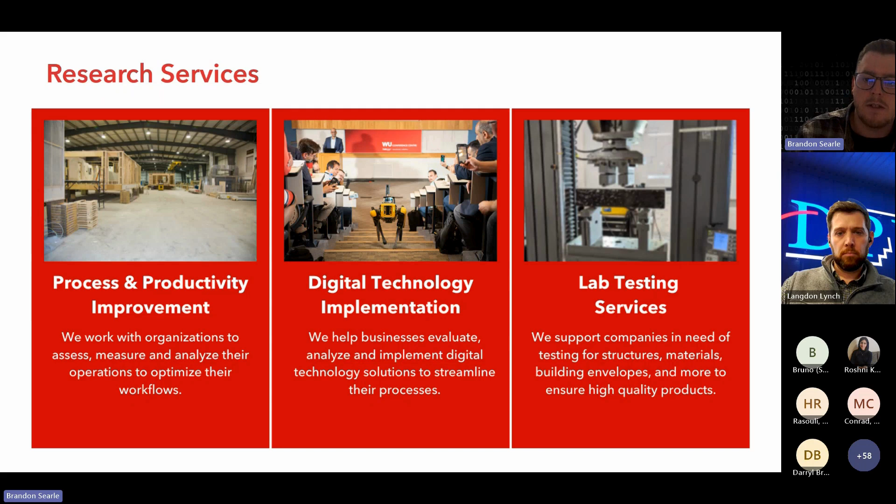Over the last 5 years, we've really focused on 3 core areas of research: process and productivity improvement, and digital technology implementation, which kind of overlap, as well as lab testing services. We've recently completed the training and commissioning of our new equipment for the building envelope testing lab, which will focus for now on air testing and water leakage, and we hope to get into other forms of testing in the future. We're excited to be doing that in 2025.

And so we do a lot of research in that area, which will hopefully guide policy, current state of the sector, new standards, procurement strategies, etc., to be able to leverage the sector and really hopefully increase productivity in the construction sector.

So in addition to the OCRC, I'll put on my Building Transformations hat. I sit on the board of directors here. Building Transformations is a not-for-profit organization, originally branded as Canada BIM Council, and has since rebranded over the last 5 years.

and has a presence across North America. Building Transformations drives the building and construction industry forward. It has many programs to serve members, including both in-person and online events, a certification program for professionals, organizations, and educational institutions, and think tanks for different segments of the construction industry, as well as the annual awards program and the annual Innovation Spotlight publication.

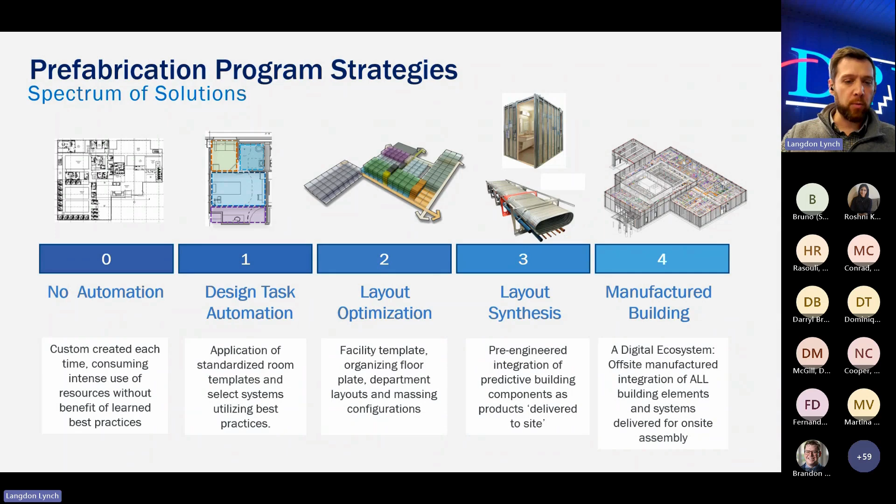Once we get into the actual projects themselves, we start very early on, and we try to get as far left of the line as possible with our teams, and really get them an understanding of what's out there, what potentially can be prefabricated, and what's good to potentially prefabricate. I feel like I say it all the time, but just because you can prefabricate something doesn't necessarily mean you should.

It has to make sense from an overall cost and schedule standpoint, as well as execution. Execution is definitely a big thing we've found here. It can be a hurdle if we have a team that doesn't have a lot of experience with something, and doesn't have the means, understanding, or even local workforce to facilitate the individual scope or installation. That's where that national team comes in, where we have SMEs that can dive in, people like myself and others who can really sit with the team and outline the specifics around the individual prefabricated units.

Moving from the pursuit phase into SD, that's when we really start to look at overall pricings and quotes, as well as start to integrate the individual scopes into the overall design process. The best case scenario is that we can get these things baked into the design before we get to that final design set that we're going into buyout with.

From there, we really are looking at, let's track what we're doing here. We feel that if we're not keeping score, it's just for practice. So we really like to make sure that we're understanding, is this something that worked for cost, worked for schedule, but is it working for our field teams?

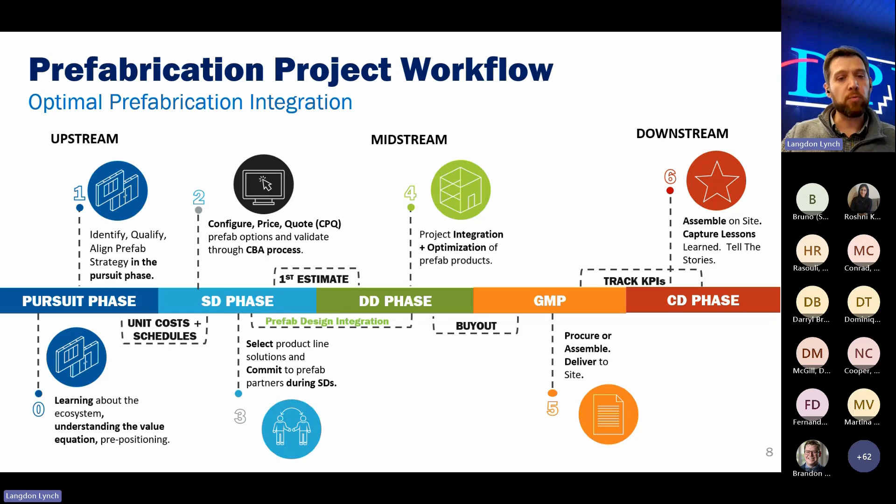Is this something that they can easily install? Is it something that makes sense in the long term? Is this something that's repeatable that we could push forward into the next project with? And then obviously close that loop, feeding that information back into the overall database we have on each of these individual scopes, to help us be better informed when we go to the next project and work with the next team on getting these individual scopes in place.

So in terms of that early support, what we like to do is put together a main assessment of the project to start off with, to really dive in and say, here are the individual pieces that we feel are, out of the gate, the best case scenario for us to prefabricate at a very high level, just to get a sense from the team in terms of where they're at with it.

Is this something that they feel would make a difference? Is it something that's on the critical path that could potentially make a difference, not just for the individual scope associated with this prefabricated effort, but how could it also affect the project as a whole around it? Is this going to reduce some of our other lead times or open up areas for other scopes and trades to be able to get in sooner?

So using this assessment, we really sit with the team and go over those individual pieces and parts and agree to it and just say, okay, this is what we're going to do and this is how we're going to move forward on it. And a lot of things get left on the table once we go through there.

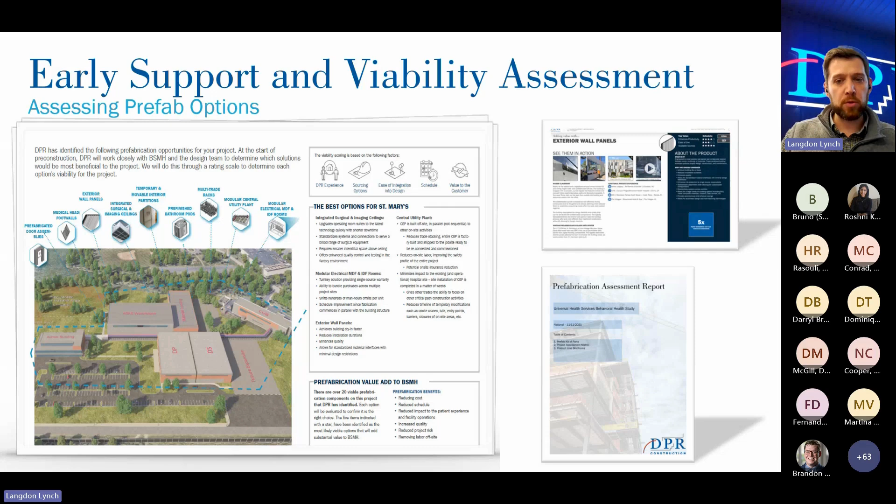We'll potentially come with 10 or 12 different ideas or possibilities of the potential scopes for a project, and a lot of times it's only 2 or 3 or even 4 that we're coming out with on the other end. It's really about that alignment that I feel is setting us apart in the construction industry right now, just in terms of how we're looking at projects and how we're approaching prefabrication as a whole.

So I wanted to give you a couple of quick examples. I've got some more overall project examples, but just to give you a sense of some of the things we've been seeing, some of the top items around the region.

We've been working very closely with a prefabricated steel manufacturer, so no hot work out on site, everything's bolted connection. We've seen really great advances around that, just in terms of number of pieces put up in a day, as well as overall costs associated with them too.

Then multi-trade racking, that one's been around forever, but it's definitely something we've seen a lot more of, and it can make a big difference out on our project sites. You're talking about tons of work with the MEP trades that we can move off site ahead of time, get all racked up, and maybe even put shaft walls on if we're talking something like a vertical multi-trade rack, and be able to put all of that work in place with one single pick and then have those individual connections between them. Makes things much, much easier.

Some of the other pieces like our stairs, our exterior panels, doors and hardware, interior panels, things like that are just scopes we've identified that we're able to do off site, that we feel make a huge difference with what we're trying to do in terms of overall cost, schedule, and of course safety and quality.

A lot of the things we tout with prefabrication is that the guys are coming to the same location every single day. It's a nice controlled environment. There's no work at height. Everything is right where they need it to be, right where they want to look for it. And that really increases the overall quality we're seeing out of a lot of these individual prefabricated scopes.

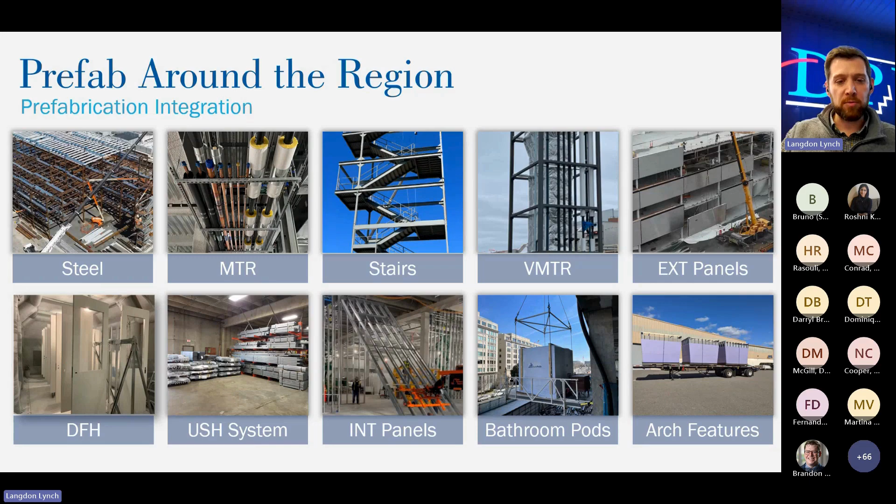In addition, we've started putting together overall execution documentation around these items, especially the things we're seeing all the time that are very complex. I mentioned those multi-trade racks earlier - that execution document right now is somewhere around 30 or 38 pages, covering what it is, how to lay it out, and the specific roles and responsibilities for each individual team member who may need to execute around them to make this successful.

We've tried to put these together to make it as easy as possible for our teams to come up to speed quickly. We've also started developing pre-con cheat sheets around these individual scopes to help our pre-con teams. It's great to have the installation and backing from our field teams, but it also means we have to educate our pre-con teams to estimate this correctly, as well as buy it out correctly. We feel that educating all the way left of the line is how we're going to continue to see this grow.

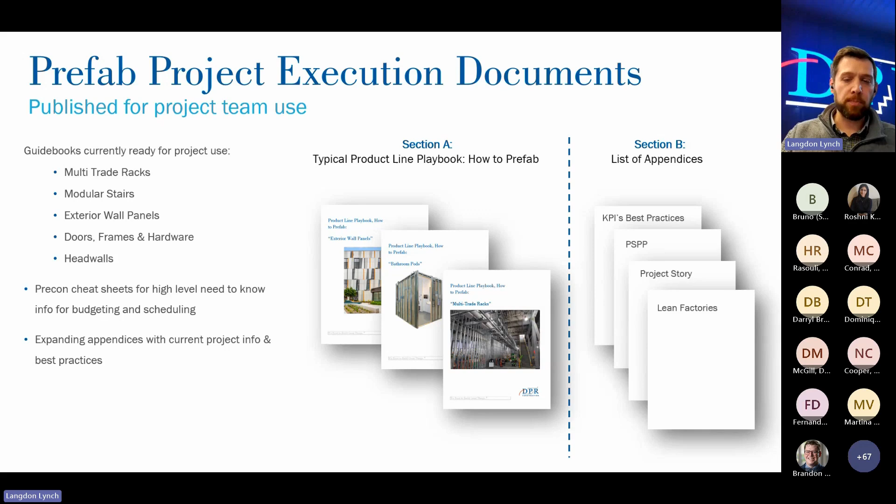In addition, we've started creating overall smart blocks - standard detail libraries, individual model pieces that we can use to help our design teams. As we're coming into this, if we see they just have a placeholder for some of these items, or there's nothing with that specific detail around connections, heights, or widths, we try to fill that gap with this virtual library we've created. Hopefully this will continue to grow as we build out some of our other scopes.

It's something we've seen really make a difference, especially on some of our larger healthcare projects with our ceiling details, allowing them to say, this is that connection point coming in - all of the MEP around the overall floor can then be connected directly to that. Even if it's not the final OR assembly going in, it's a great placeholder to give them a sense of what this is going to look like, how it's going to go in there, and how it's going to make those connections.

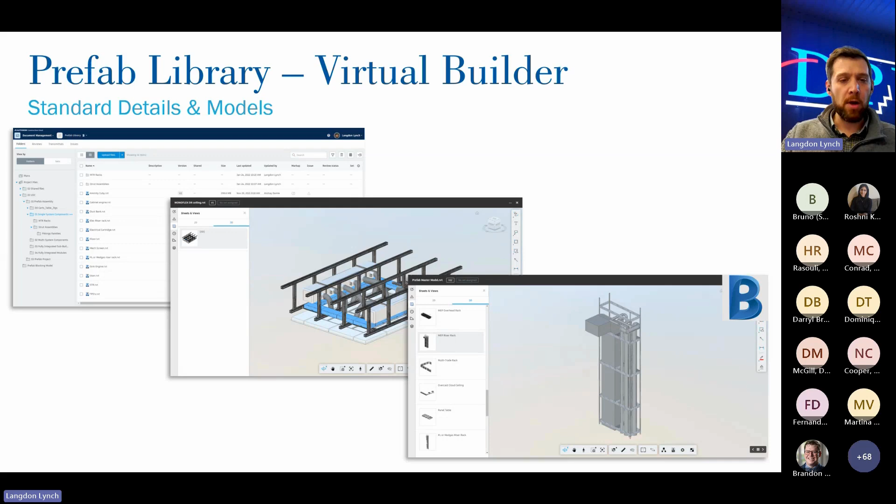So I mentioned that family of companies overall before - just wanted to give you a quick list of the individual groups associated with us. Digital Building Components is our exterior wall paneling group. EIG is our electrical, low voltage electrical group. GPLA we've recently acquired to help with overall structural engineering - they're not specifically focused on prefabrication, but can do anything from overall structural design of the building to third-party engineering reviews. It's really just a great thing to have in your back pocket.

It's definitely made a difference when we come up with something out of the box, and we're able to go to them and say, what are we looking at here? Is this something we can do out of this material, or should we look at something else? What are those connection points, and so on? That's been a great addition. Our OES equipment is our trade and equipment arm, where we can rent tools and pick up any PPE we may need, associated with the majority of our job sites. SurePods I mentioned earlier with our bathroom pods. RQ is our overall investing firm, along with WND Ventures.

VCon is our overseas design, detail, and VDC group. We do have VDC leads here in the States that are direct reports to the project teams. These are the folks that are really helping us behind the scenes, getting all those button clicks done, making sure we have all the specific details, reviewing drawing sets, and getting back overall RFIs.

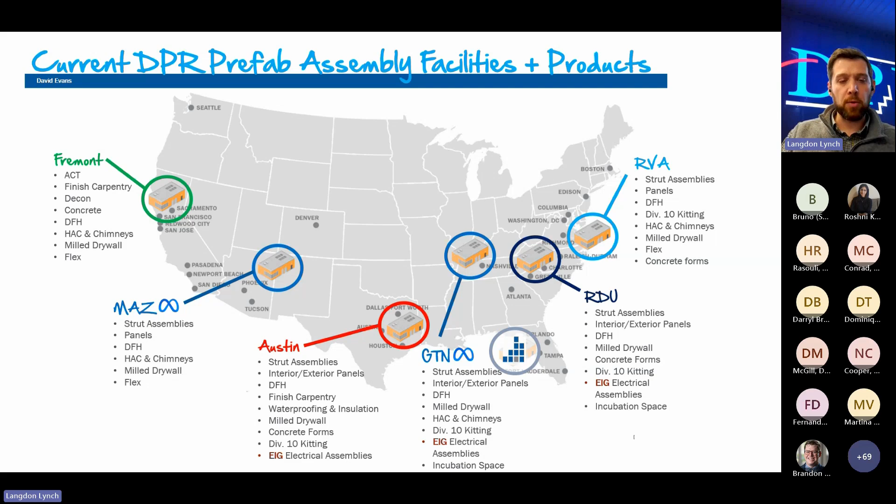Definitely, we want to keep lead times in mind with all of that, but hopefully this gives you a sense of just how much we've really thought through how to execute this overall prefabricated effort.

Along with that, these are our subsidiary companies I was mentioning before: EIG, SurePods, and DBC. All of them, again, strategically located around the country so that we could potentially get those products to wherever we need within a day's travel.

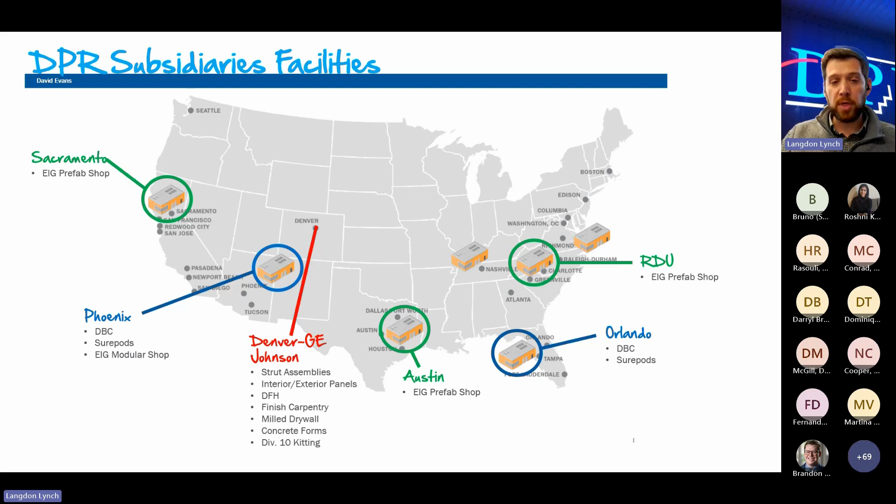So I keep mentioning DBC here. Wanted to take a second to give you a quick overview of what they do, kind of what that facility looks like. If it's okay, I'd love to play just a quick video to give you a sense of what that facility looks like. Hold on one second.

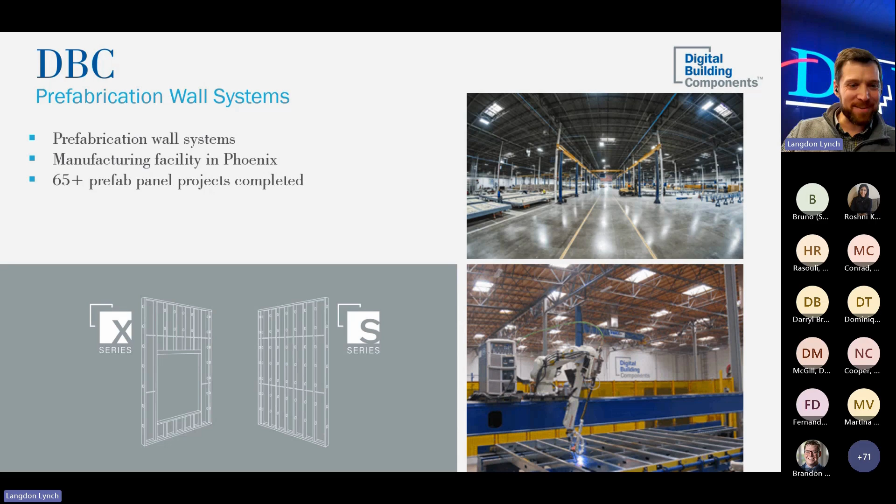I'll turn on my mic to let you know when we see it working. Sorry, man, this is the one I didn't have right at my fingertips. One second. Yeah, no worries. Here we go. Okay, let me skip through since I missed that opening part there.

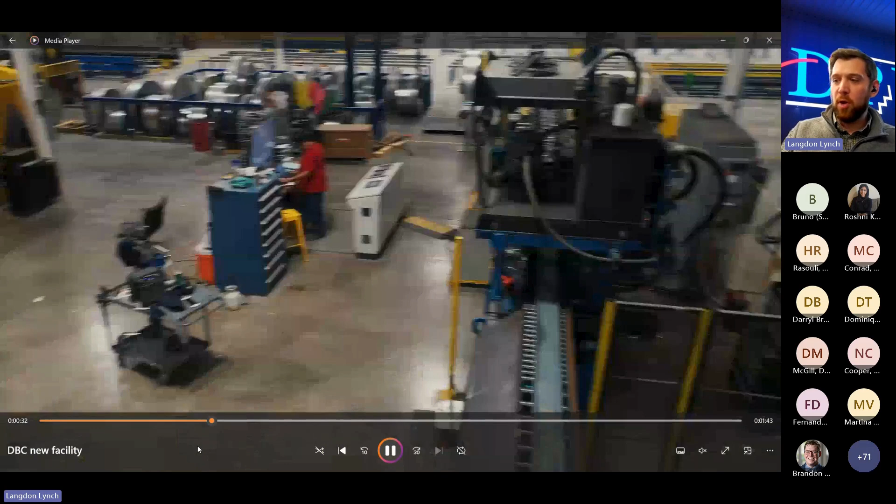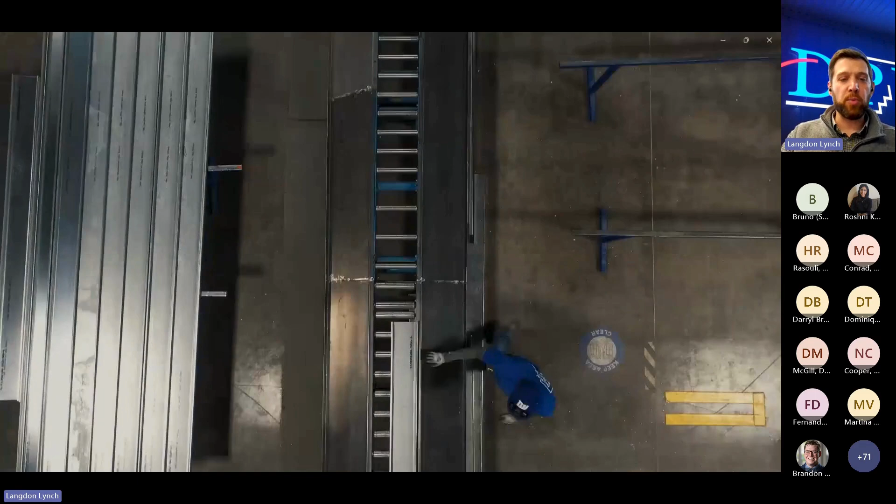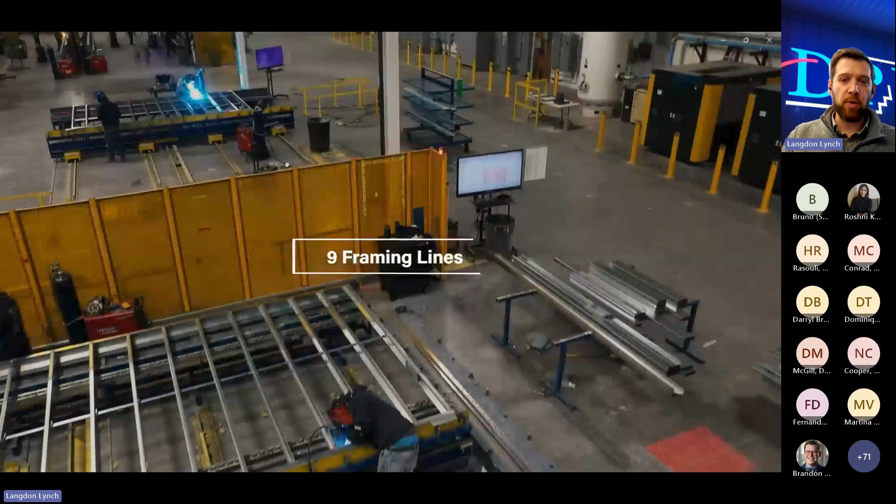So overall, the main line here that you see, we've got roll formers set up throughout. What we do is take all of our modeling information around the studs directly from the model, pull it out. All of it's labeled, has individual IDs, specifics around where it goes and what panel it's located with. We're rolling, stamping all of that ahead of time, pulling that out, and then it's going directly onto our overall tables. You see there the 9 framing lines we have set up in that facility to really facilitate overall production, no matter what the need may be.

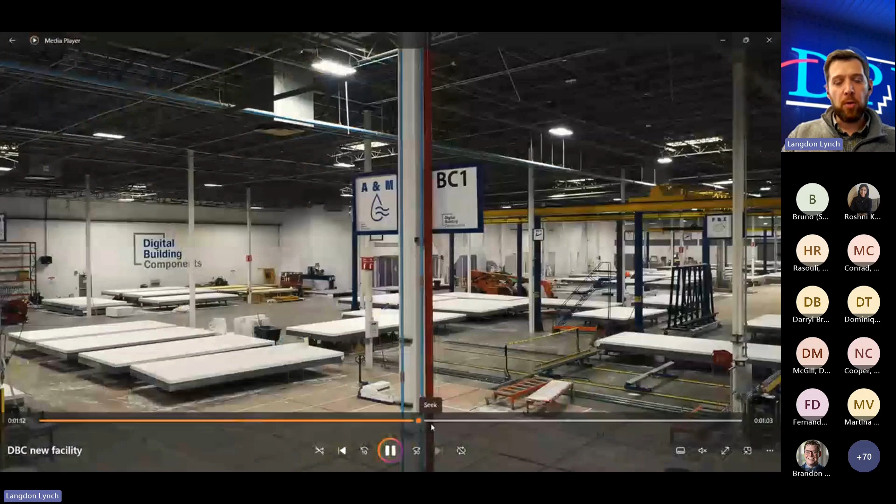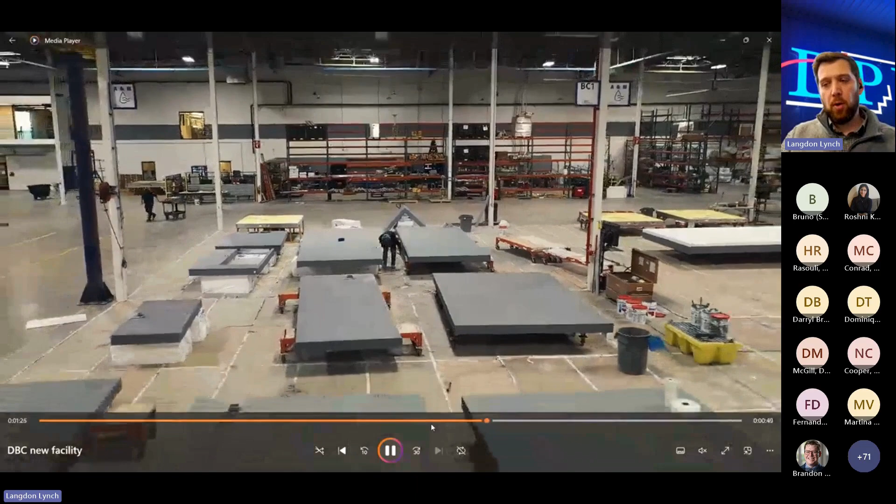Depending on where we're at and what's going on, these guys really have the capability to ramp up and provide whatever's needed. So it's all the way from just regular AMC panels all the way through to our overall finished panels with sheathing on them. We can really take it from backing all the way through to our overall finishes and get specifically what we need depending on whatever the project may call for.

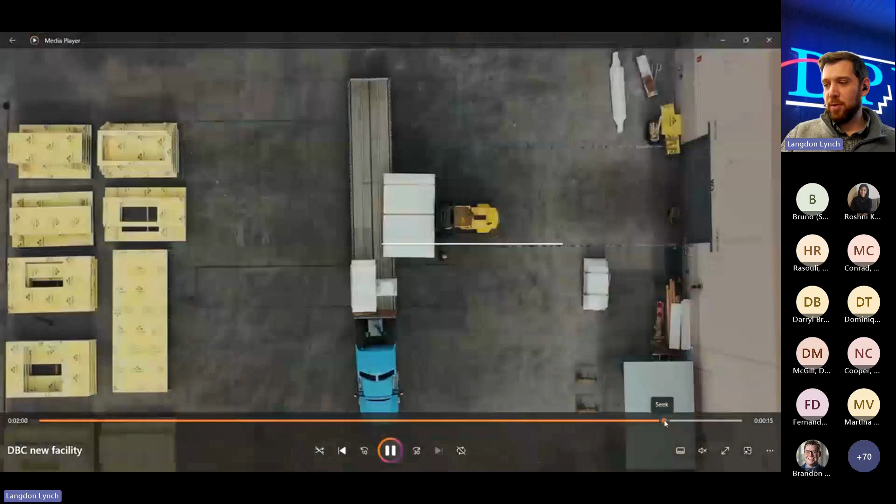So here, I'll speed this along here real quickly just to give you an overall view. But outside space as well, so just a ton of space there for us to be able to move things out as things get done and keep our lines moving along.

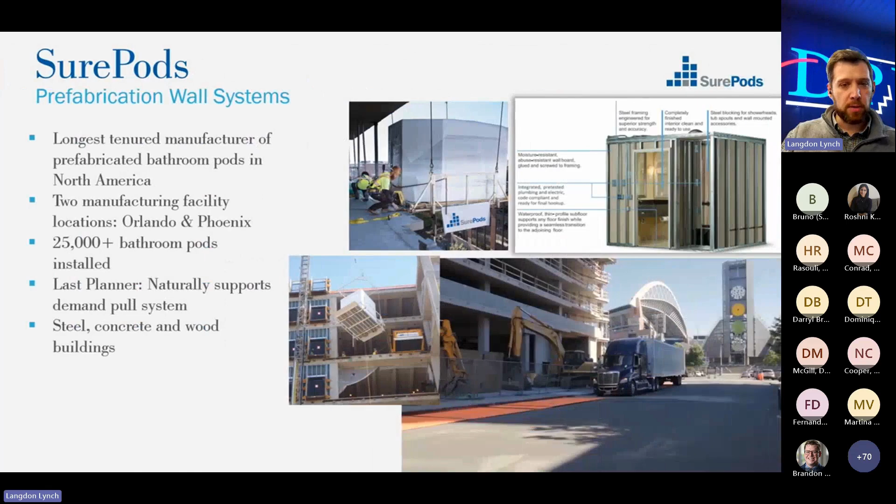So next up is SurePods. I mentioned that one as well earlier. Oh, okay, hey look at that, it's working. So just to kind of give you a sense of what that looks like coming off the truck and going into place.

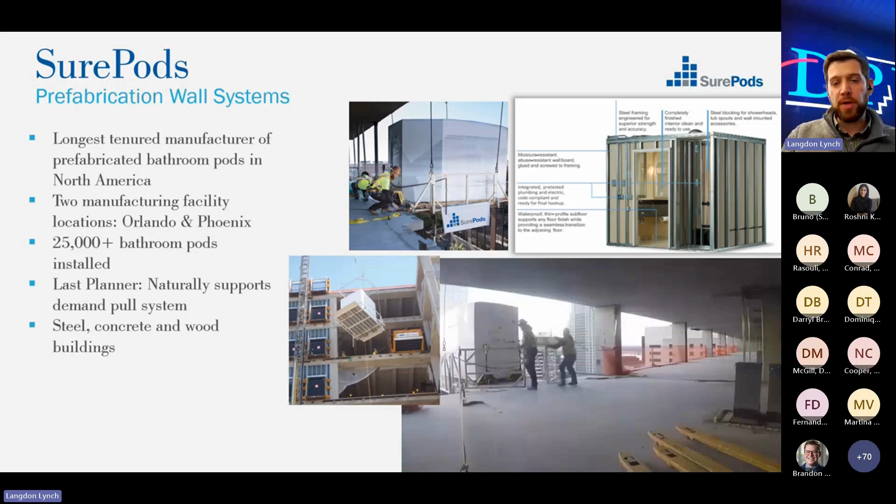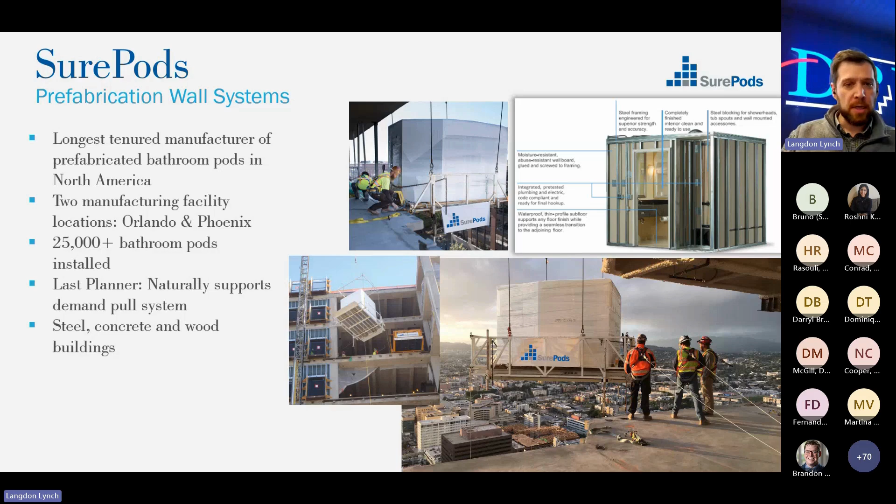EIG, I don't have a cool video for unfortunately, but wanted to at least show you some of the things they're doing here: prefabricated electric rooms, electrical stands, low voltage wiring harnesses, interior wall device packages. You name it, these guys are able to do it. We've got UL listings on quite a few items right now, and they're looking to continue to expand and make that modular piece of what they do larger and larger, so we're providing that much more incentive and help to our project teams in general.

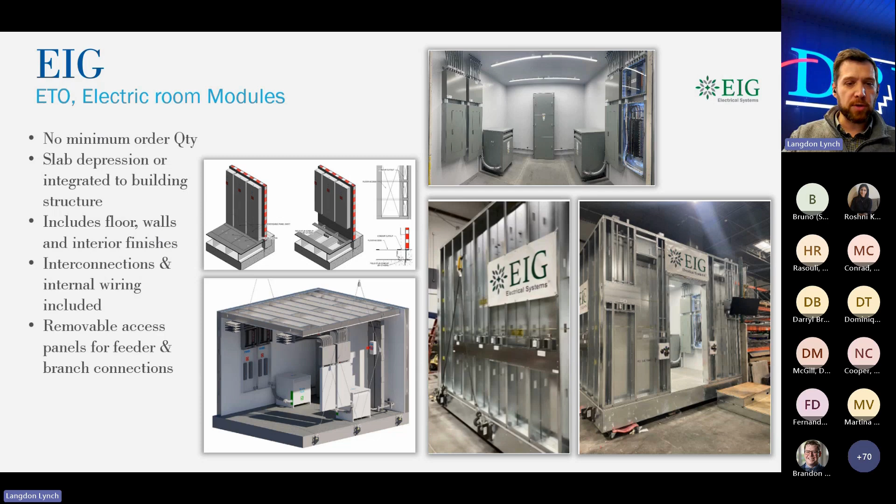So with that, I wanted to jump over quickly to some of our case studies and give you guys a sense of what we've been doing, with a couple of quick pictures out on site to show what some of these elements may look like.

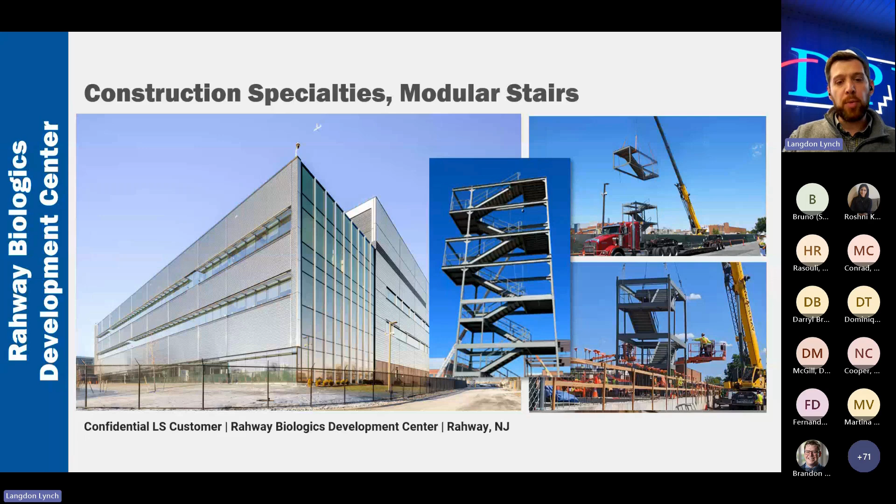This specific tower, the superintendents were calling it the Stairway to Heaven, went up in a single day. Out on site we had 2 of these on this project, and both went off fantastically. We had quite a bit of prefabrication around this project in general. They had very specific goals around prefabrication, which really pushed the envelope and allowed us to expand our knowledge and overall scopes that we're able to do for life science projects.

All right, next one I've got for you is some of our interior wall scopes. We've recently looked at some robotics to help us put some of these in place for our larger walls. All of it's pre-manufactured off-site, we've got our panel tables set up in the shop, everything's quality checked, QC'd, with labels and stickers on everything, production workflows—everything you would assume with a fully fledged prefabrication facility.

And then for the installation out on site, we were able to look at almost double in terms of what we could get from a stick build approach. So definitely something we've been seeing quite a bit more of and trying to implement more as we get into some of these other projects.

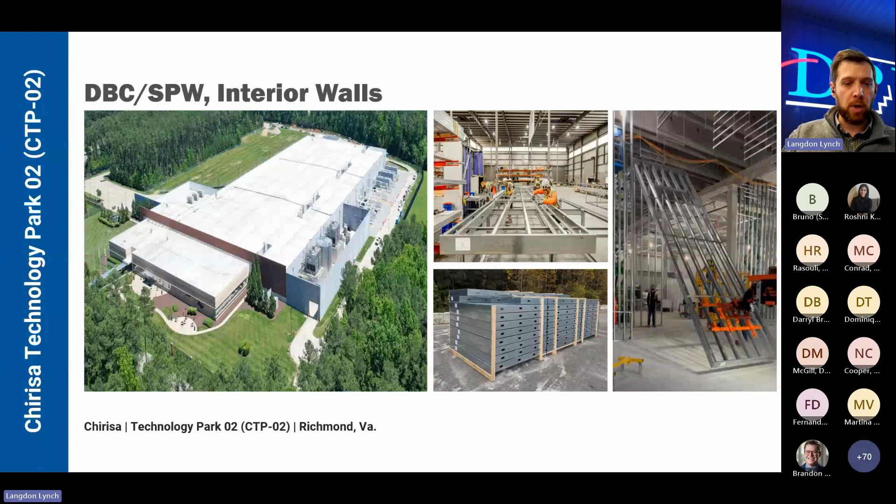One of the larger items we have is our strut ceiling system. This is specific to our main advanced tech clients, but not just there. We've seen some of these in our healthcare facilities too, where they have that overhead structure for things like ceiling mounts or individual bed hangers and attachments needed beside the beds. It's very versatile, and it's something we've been offering to our other trade partners as well, for additional hangers or the overall strut ceiling scope for our MEP trades to attach to within these data center spaces.

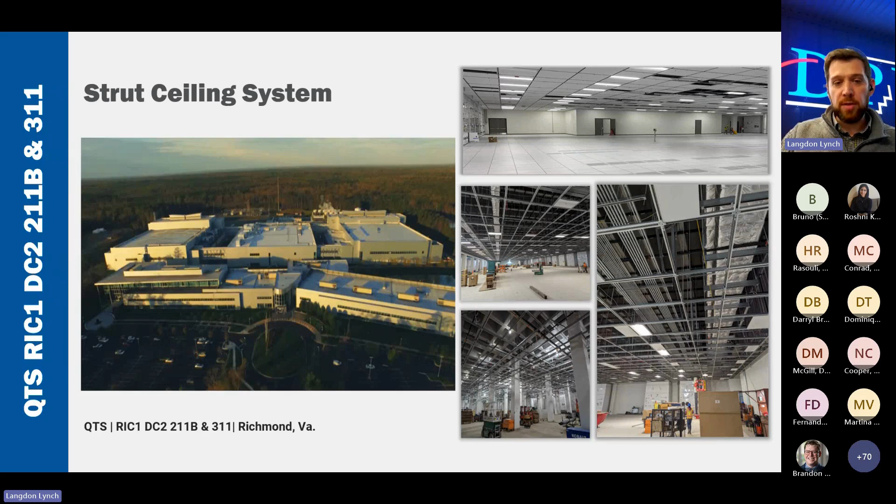I mentioned the vertical multi-trade rack earlier, so I'm going to show a quick video here to give you guys a sense of what that looks like.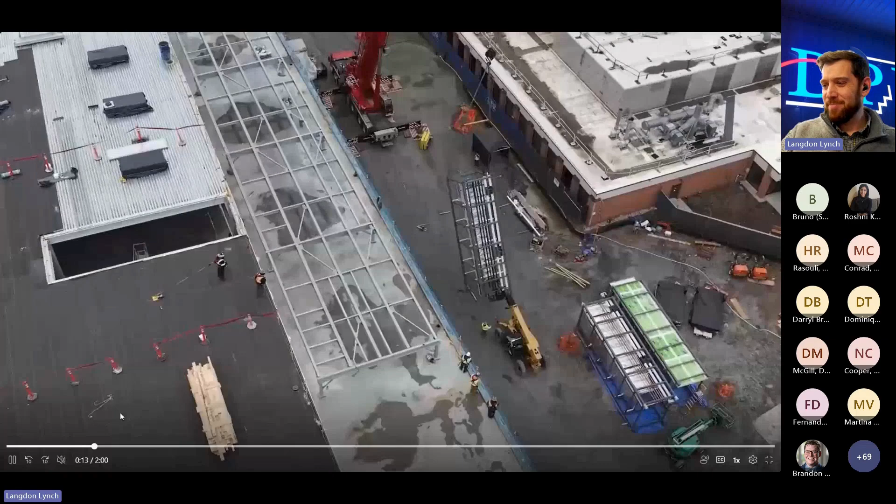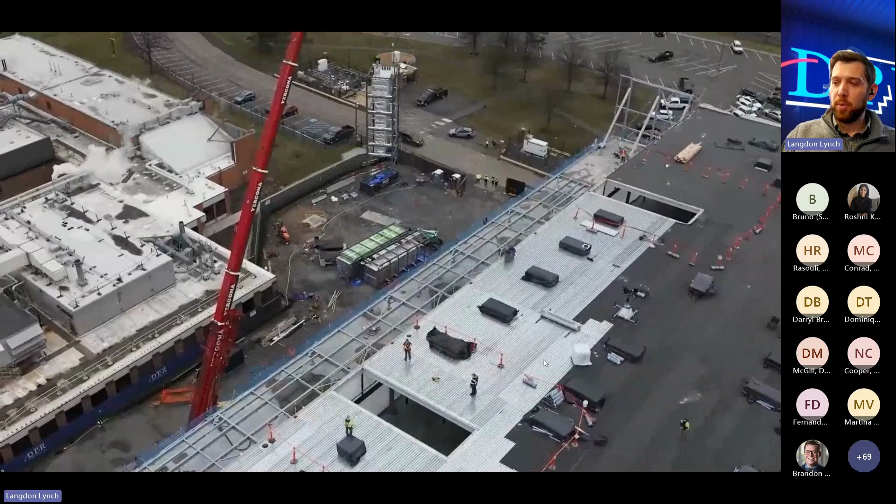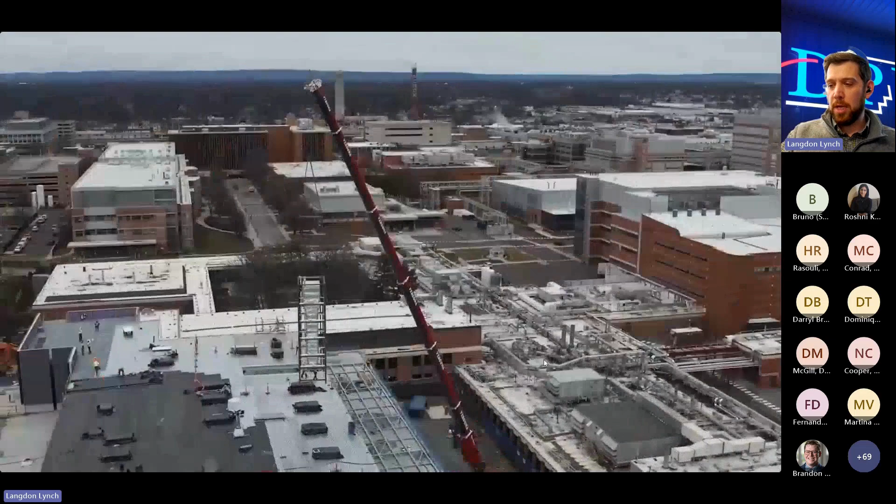As you can see here, these are rather large assemblies we were putting in place, about 42 feet a piece. We had 4 individual shafts that we had to put these in, 4 stories up each, so we did 16 of these overall vertical multi-trade rack assemblies. Really cool shots here of them going into place. Love showing this video, a lot of work went into that, a lot of people involved, but overall a huge boon to the site.

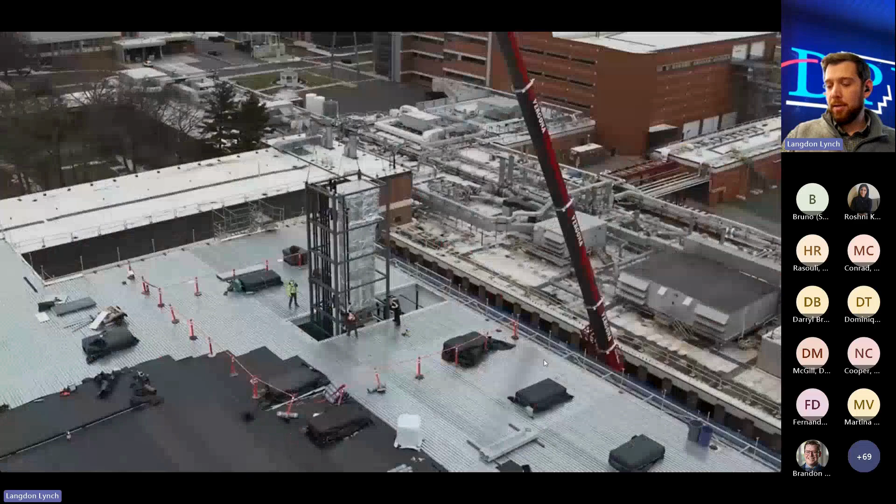This was one of those items that afterward, several superintendents came to us and told us how much they really loved those going into place. It helped with safety and quality, as well as reducing the number of man hours being put in at heights that they didn't have to deal with on the site. This is definitely something we're looking to do more of as we see opportunities for this type of assembly on future projects.

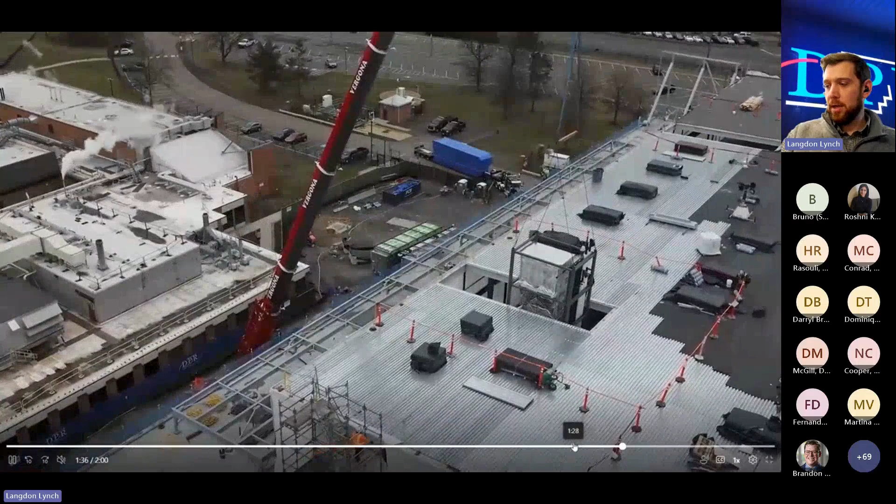So there it is, just sliding right into place. Love it. Let me grab that back here real quick.

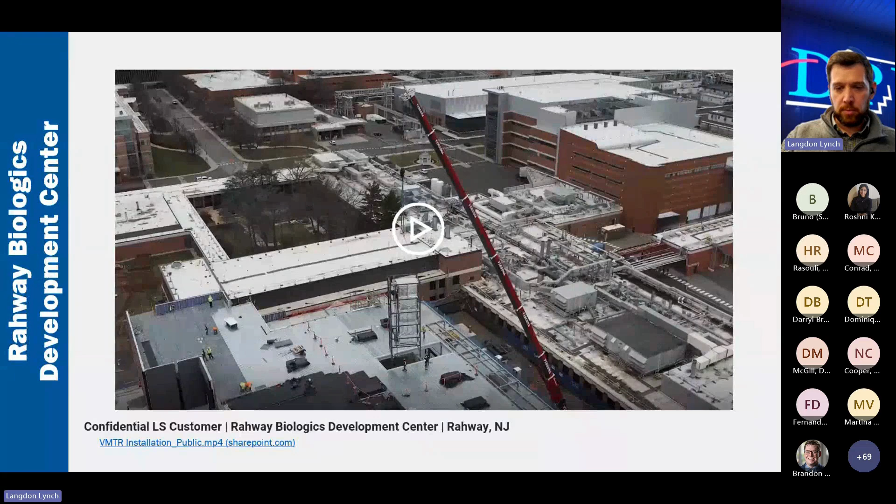DBC also can do our structural framing members. So if we have a situation where we'd need an approach to a project like that, we're able to rely on them as well.

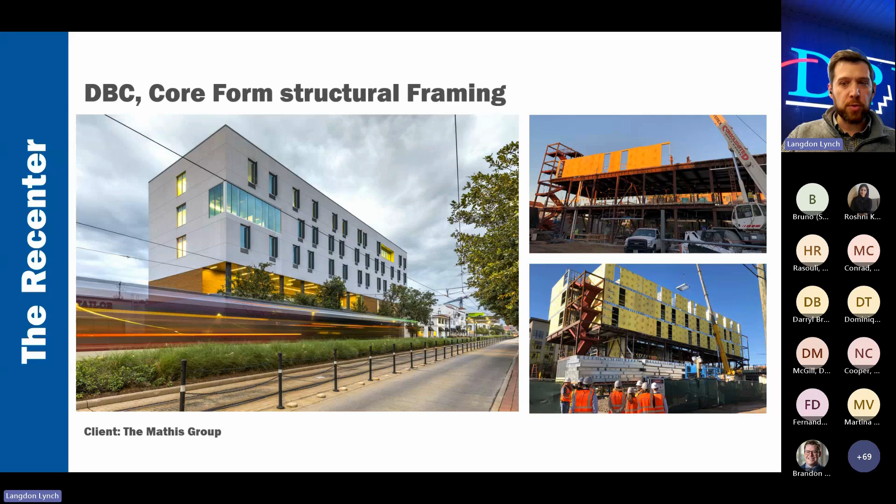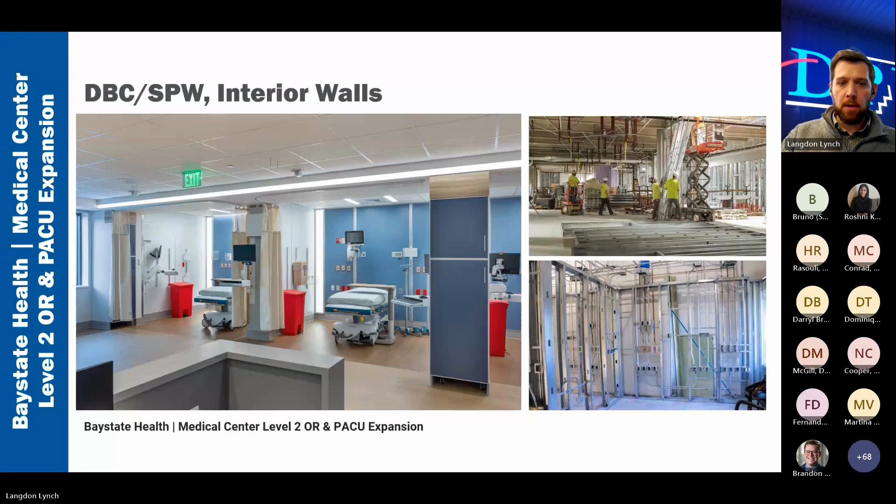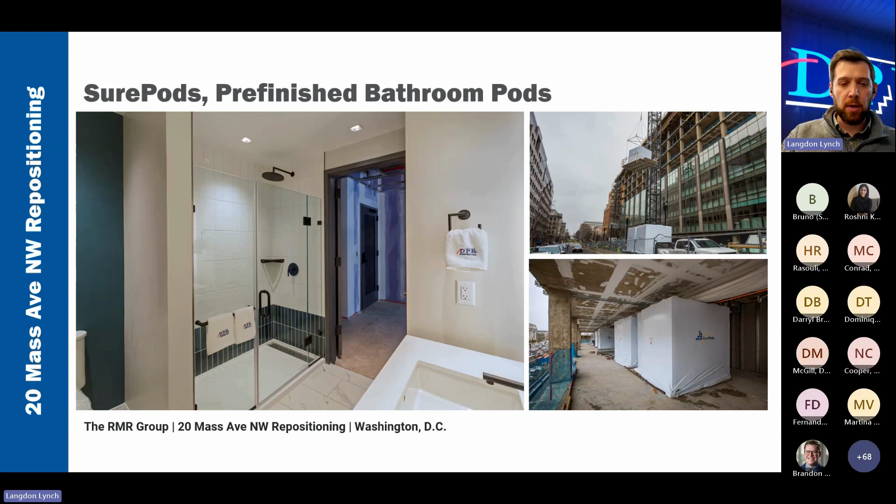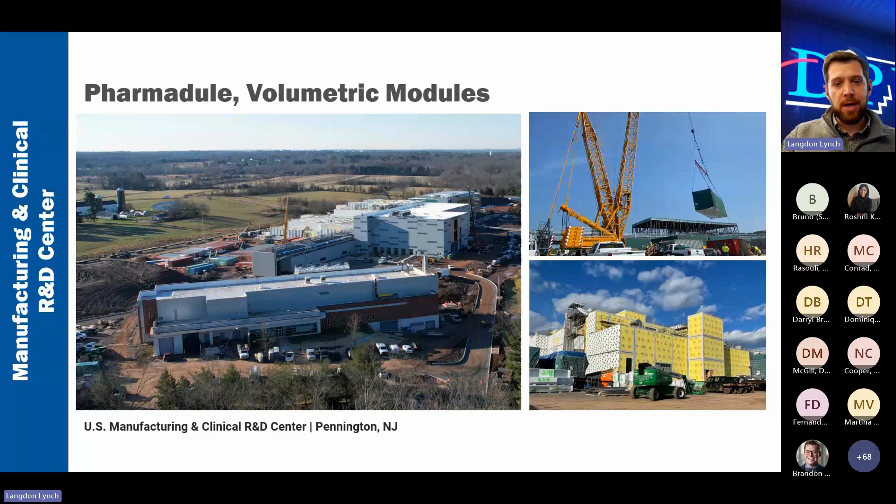One of the last ones I have here for you is one of our latest projects out of New Jersey, a volumetric modular project. To me, this is really the holy grail of prefabrication. These are large, think Lego blocks, about 20 feet by 40 feet. They include everything on the inside, all your equipment, all your finishes, all your overhead MEP, your flooring, your structure, everything is included. We just completed a project in New Jersey, and I wanted to share that quick timeline with you guys. Let me pull that up.

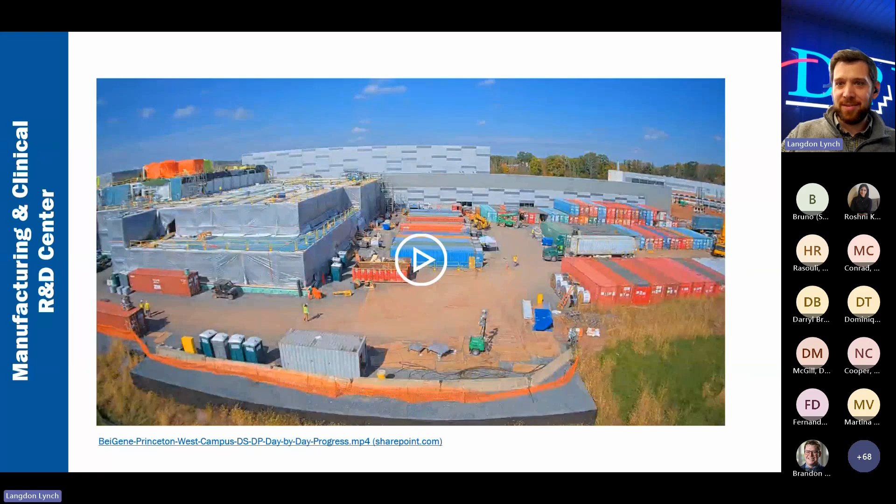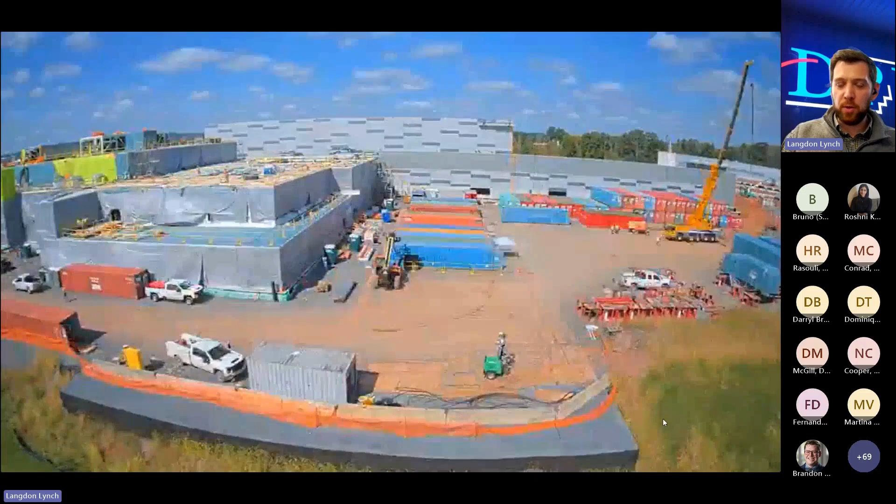Just to give you a sense overall of just how fast these are going into place. Obviously it's sped up quite a bit, but it gives you an overall sense of how many of these are going in, how quickly they can go in, and what all they include, as well as what they have in them. This was a massive effort and undertaking.

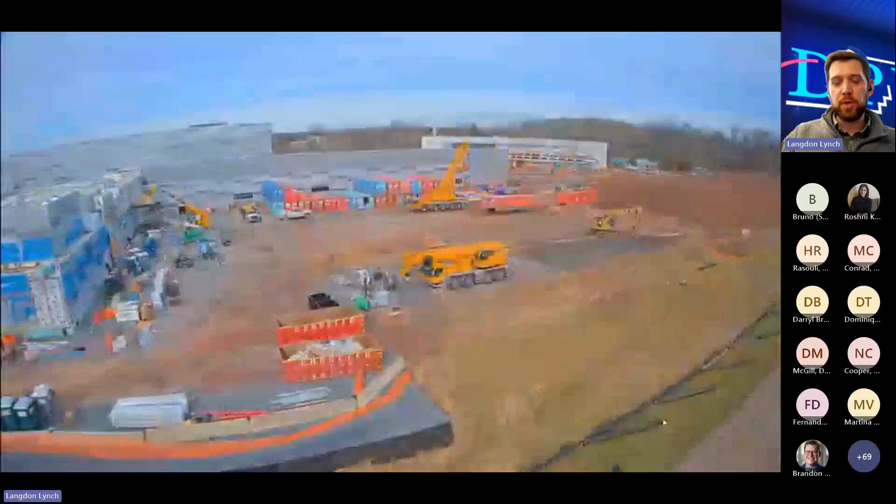We had over 400 overall modules. All of them came in, and the only real issue we had was shaking out all the individual wall units, the structure wall units that get placed over the interior walls to cover up the MEP for that final finish look. That was really the only hiccup we had in the whole process, and it's going to be a really great looking building as soon as we get it done.

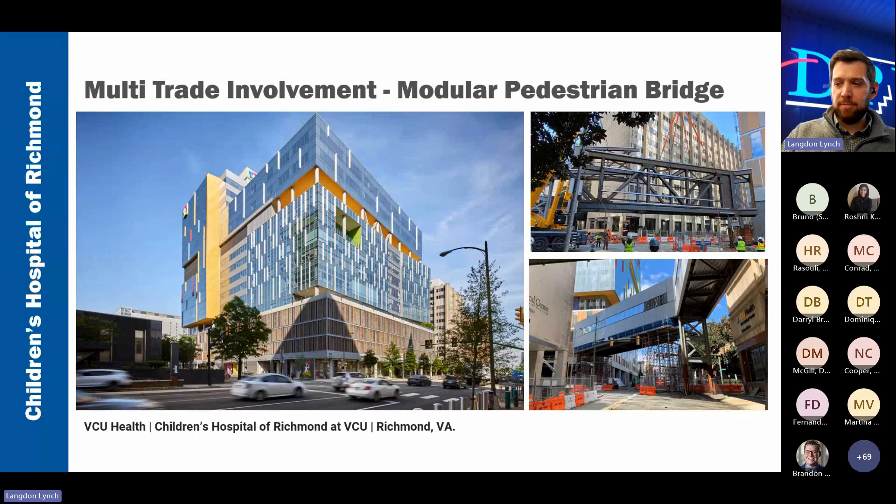So with that, I think I'm pretty much wrapping up here, and that's all I really had to give you guys. Hopefully that gives you a sense of what we do at DPR and how we do it, and how we approach it in general around construction. Definitely look forward to any questions you guys may have, and see where the conversation takes us.